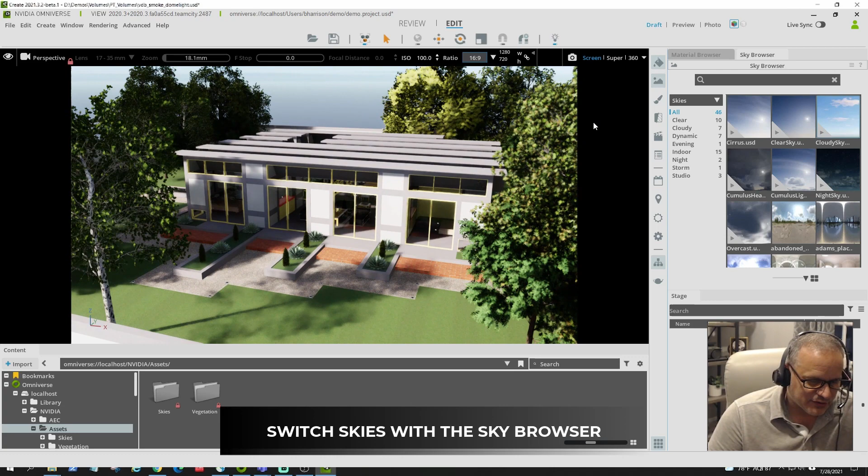Excellent question. All right, so when we started View, we actually focused View a bit more on AEC - that's where we're doing a lot of our review and approvals, connecting to Revit and SketchUp, and you can do great renderings with it real quickly. But we were finding that a lot of people that wanted to do this editing for AEC actually wanted a lot of the tools of Create as well. They want to animate, like you saw with the sequencer, animate walkthroughs, do 360 renders, and do a bunch of stuff. So we actually pivoted a bit.

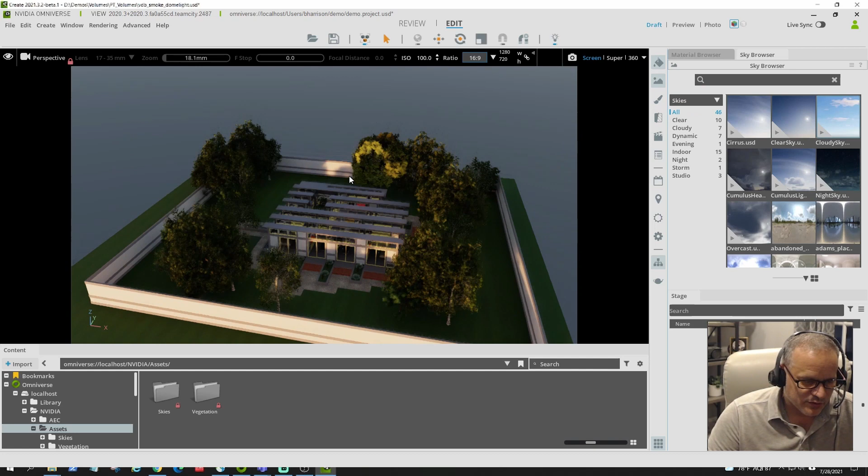Because everything's extensions, it just moves them around depending on where we want them to be as a persona. So we moved a lot of the editing functionality, like doing things like the sequencing and animation and stuff like that into Create.

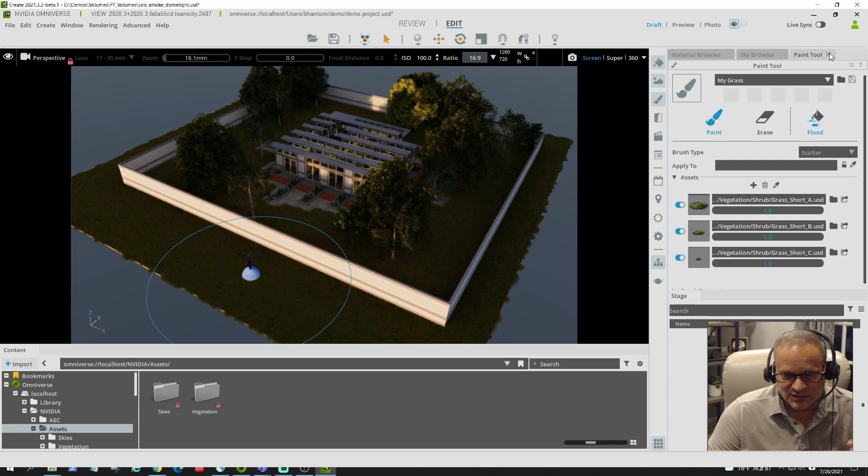So Create is where if you're an AEC professional and you want to modify the scene, add animations, and render them out, use Create. View is where we're positioning it to make it easy. We wanted it to stay easy, a fast review and approval tool, where you can do your review and approvals.

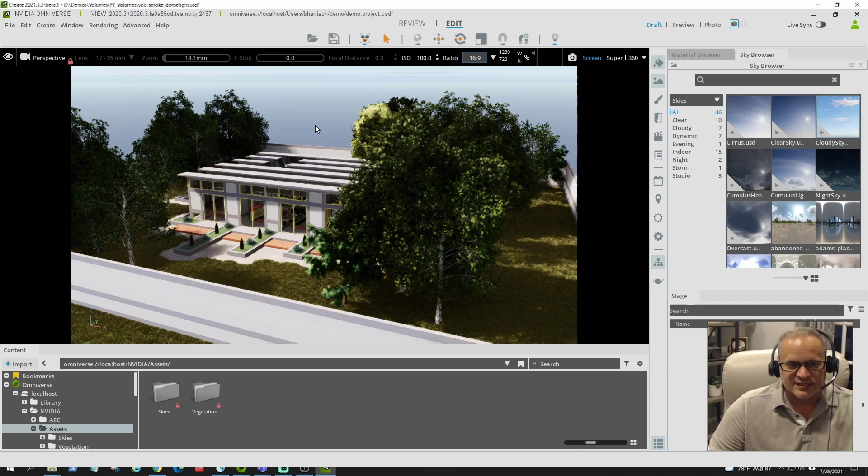We can stream out views from that, do XR and AR from that. But we wanted to make it a really easy tool to just click on a scene, view it, change the sun, maybe edit a material, but not go too deep into the editing, because we wanted to make sure that client reviews and executives can use it and it gets easier and easier. So it's a really easy to use review and approval tool, and that's where we're going to focus that tool.

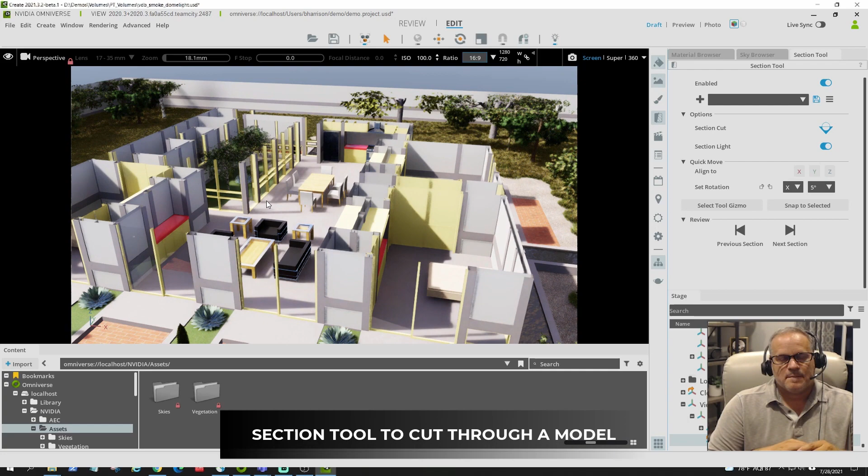One of the interesting things about working with a Nucleus server is anything you're working on that's being saved as a USD, you can go from one app to the other. As we mentioned before, having this connectivity between apps means you can use the best app for the job, whether it's Max, Maya, Blender, or any of those external third parties.

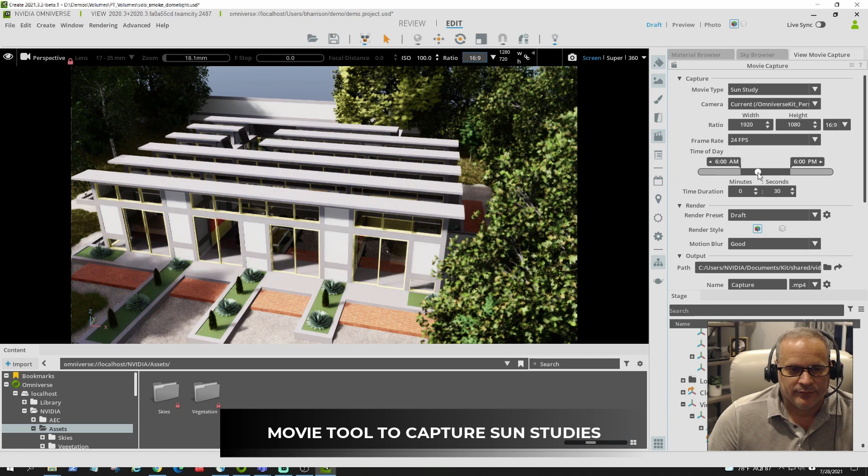But that's also true for Omniverse apps. So if you want to jump into Machinima to do some animation, you like that layout, or you want to jump into Create, or you want to jump into View to just do a scene review, you can do that. The file is independent from the application.

But yeah, even with IRAY, you can switch between these different modes. You can switch between path trace mode, or switch to IRAY mode real easily, on the same exact data set, same exact materials, whatever you want.

Are there other renderers that can be added inside Omniverse, and what are the requirements for that if another renderer wants to get added?